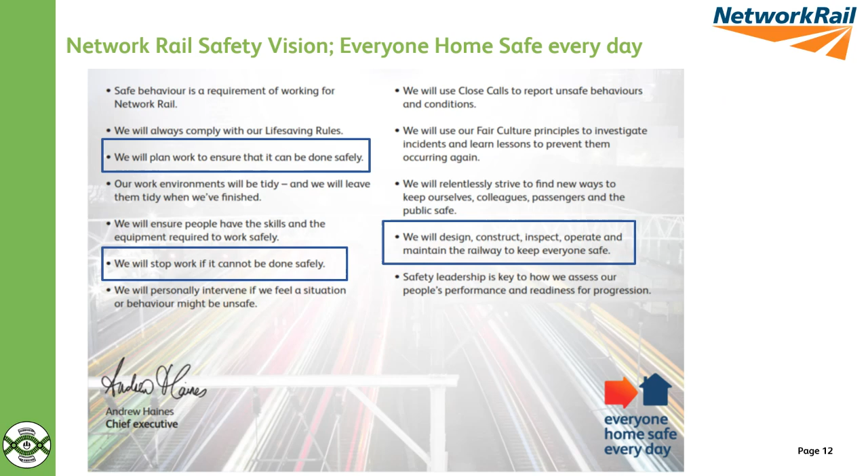With that in mind, and you've already seen a couple of examples of where temporary works is vital to us providing efficient solutions, we want to provide those efficient solutions safely.

So let's talk about what are temporary works. Spend a few minutes on this one. The HSE have said temporary works are the parts of the construction project that are needed to enable the permanent works to be built. You can probably read this faster than I can say it, but I'll say it anyway.

Usually the temporary works are removed after use, e.g. access scaffolds, props, shoring, excavation support, falsework and formwork, etc. Sometimes the temporary works is incorporated into the permanent works, e.g. haul road foundations and crane or piling platforms may be used for hard standing or foundations.

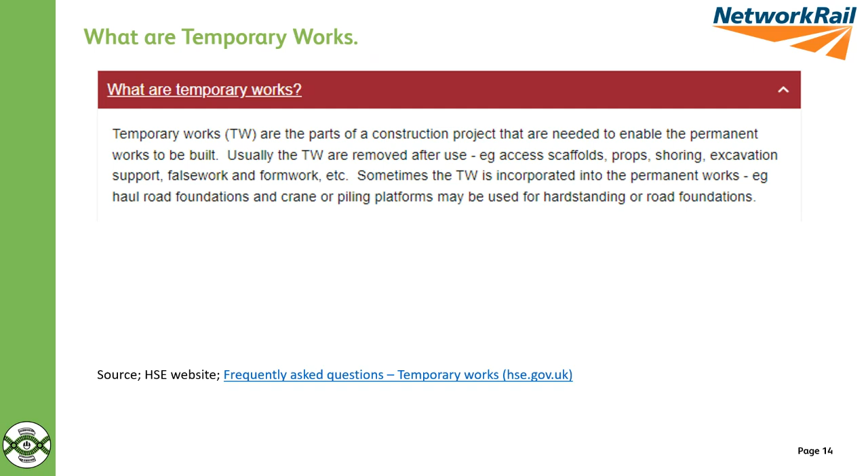The reason why I've got this on the screen is actually what it says next. It's very important that the same degree of care and attention is given to the design and construction of temporary works as to the design and construction of the permanent works. As temporary works may be in place for only a short while, there is a tendency to assume they are less important. This is incorrect.

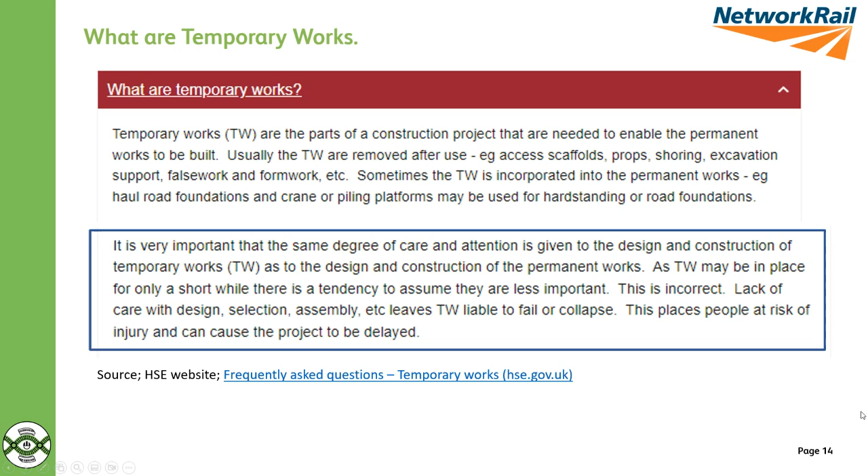Lack of care with design, selection, assembly, etc. leaves temporary works liable to fail or collapse, while in fact it also leads permanent works to fail or collapse. And this places people at risk of injury and can cause the project to be delayed, reputational damage, you name it. I thought that was interesting because we're already aligned with the HSE.

This is from BS 5975. This is one of the first of many slides with lots of words on it, but I'm just concentrating on the boxed part of this standard at the moment. It can be described as providing an engineered solution, etc. That's broad, and then it lists the description of temporary works includes but not limited to all the things that you see listed. I'm just going to highlight one of them.

The description of temporary works includes supporting or restraining plant materials or equipment, including stability of waterborne craft. So for instance, if we've got a bridge structure and we have got temporary plant on that structure, is the bridge temporary works? I'll let you work that out for a minute.

Then it goes on, and so much I could talk about for hours and hours on 5975, but I haven't got the time. So I'll talk about this particular one. Permanent works designers should address the buildability of the permanent works and identify and make provisions for any temporary works and temporary conditions required by their design and their assumed method of construction. This should include, and you can see a load of things listed.

I'll just concentrate for a second on that. Temporary works and temporary conditions. So let's scratch our heads over that one for a minute. I'll also bring CDM into the fold. The designer should liaise with the PD to provide all necessary information to any temporary works or temporary conditions to the PC through the PD.

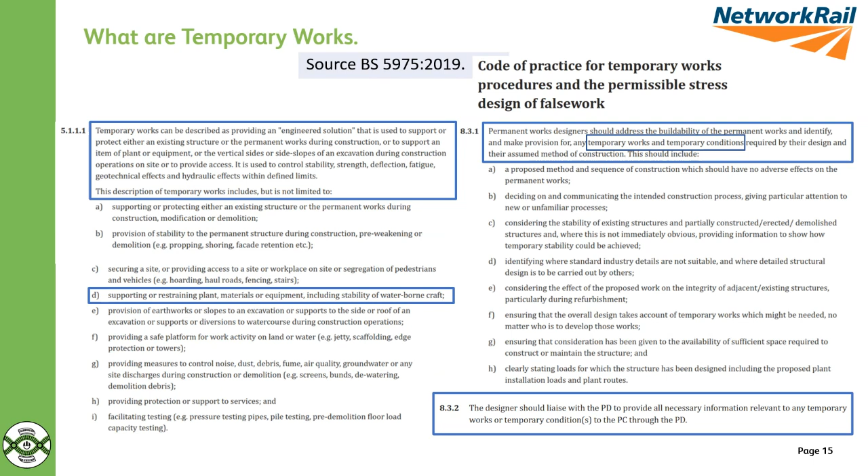When my bosses told me that I couldn't release anything from the consultancy that I was working for without a sequence of construction on it, that was for the good reasons that are now embodied into CDM and L153 by way of example.

So we now move to an excellent book, thoroughly recommend it, Temporary Works Principles of Design and Construction. I'm sure you've all read it. Please note that there is a 3rd edition coming out this year. Hopefully that will be coming out fairly soon this year, and there is a dedicated chapter on railway produced by various members of the supply chain with a bit of help myself.

And I will take this opportunity to give my personal great respect for the late great Peter Pallett, who passed away only a few weeks back and will be missed by everybody in the industry, whether it's permanent works or temporary works. Everybody owes Peter Pallett and his wisdom. We owe him for what we've learned, and hopefully I'll be passing a little bit of that learning on to you today.

So examples of temporary works include trenches and excavations. So some people think that we've got an excavation there. There isn't any temporary works there because we haven't put all the sheeting on the sides of it. No, it's just an open. Well, actually, according to this, temporary works includes excavations. I'll let you dwell on that one.

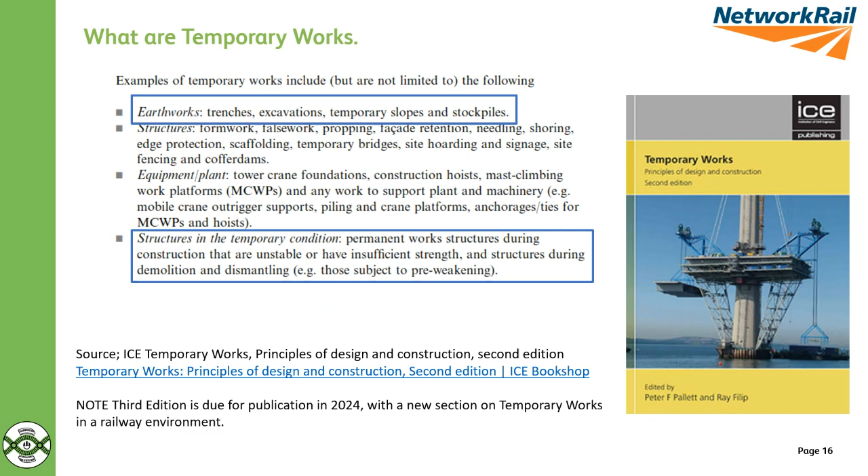What about this? Structures in the temporary condition. Permanent works structures during construction that are unstable or having insufficient strength, and structures during demolition and dismantling. So there's another take on things, and it continues.

Okay, Client's Guide to Temporary Works from the Temporary Works Forum. Now this was produced before the latest version of the CDM regulations, but nevertheless is a jolly good read, and I fully recommend it to everybody on this call. This guide asks readers to consider the following also: states of the permanent works which are temporary, loading conditions of the permanent works during construction or project execution which is not envisaged in the permanent condition.

Structures in states of modification or demolition. You're getting the gist now. And also some really important points here. In seeking to ensure that clients' interests are served with regard to temporary works, and by the way, I think that includes consultants and contractors' best interests, their reps could usefully challenge themselves with the following questions.

In what way can I be assured that the permanent works design solution is developed to minimise risk from temporary conditions? We should all be asking that question. And also, in what way can I be assured that those temporary conditions of the permanent works that need temporary works to control them minimise the extent and complexity of the temporary works, eliminating, substituting and reducing them so far as is reasonably practical to minimise the risk overall? And I'll be dwelling on that in a little bit.

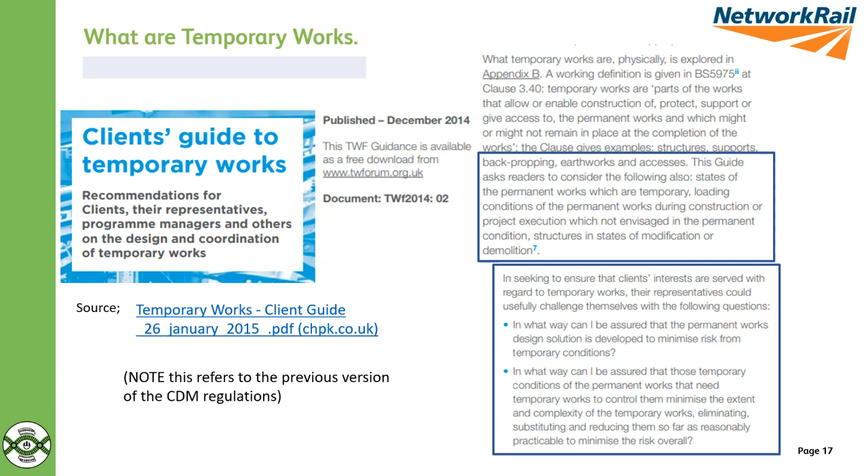Next page is Appendix B, where there's a whole page of narrative which you clearly can't read on that paper, but I'm just signposting it to you. That's a great read to talk about the wide scope that is temporary works and temporary conditions. They conclude that section by saying the safe position is to consider that every condition on site is temporary works until proven otherwise, and it gives two main exceptions, as you can see there. And then it also says, and sorry for me taking so much time just defining what temporary works is, but I think it's really important that we get the full scope.

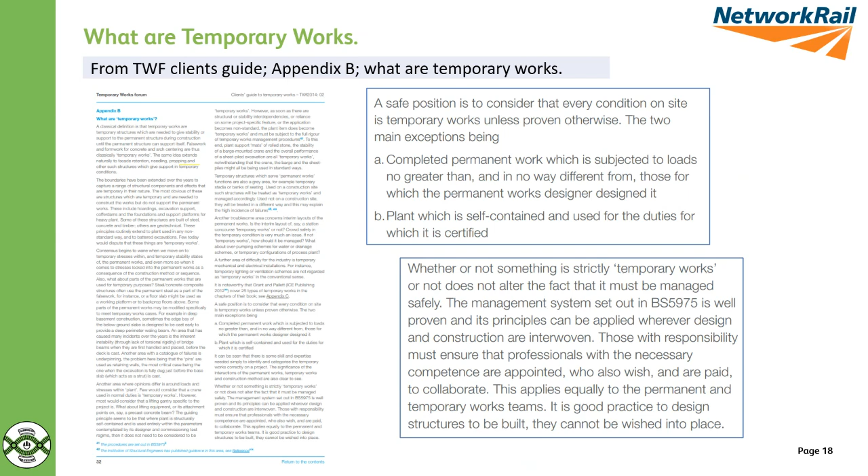Whether or not something is strictly temporary works or not doesn't alter the fact that it must be managed safely. We can all agree with that. The management system set out in 5975 is well proven, and its principles can be applied wherever design and construction are interwoven, as they often are. Those with responsibility must ensure that professionals with the necessary competence are appointed, and also wish and are paid to collaborate. More of that in a bit. This applies equally to the permanent and temporary works teams, both. And I love this little sentence. It is good practice to design structures to be built. They can't be wished into place.

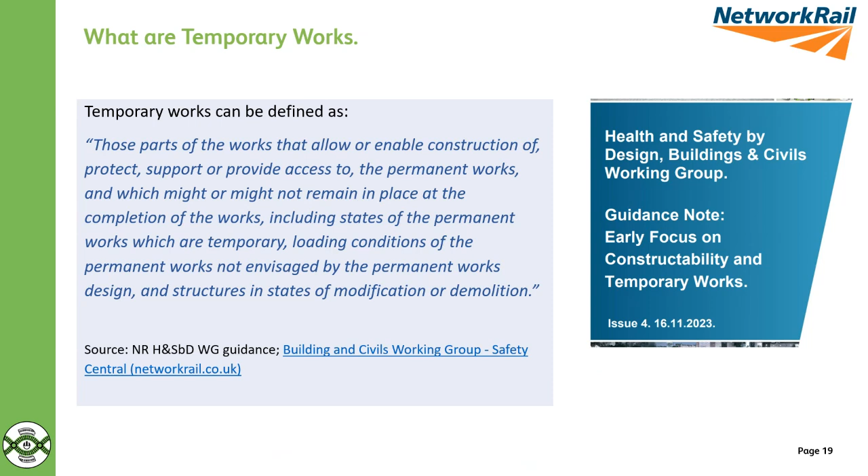So, to conclude this bit, from our health and safety by design guidance note on early focus on constructability and temporary works, we've defined, and this is a collaborative effort between the supply chain and ourselves, temporary works can be defined as those parts of the works that allow or enable construction of, protect or support or provide access to the permanent works, and which might or might not remain in place at the completion of the works, including states of the permanent works which are temporary, loading conditions of the permanent works not envisaged by the permanent works design, and structures in states of modification or demolition. So it's a coverall. And on the basis of that definition, and we can argue greatly as to whether or not it could be different, on the basis of this, I'll be continuing for the rest of this presentation.

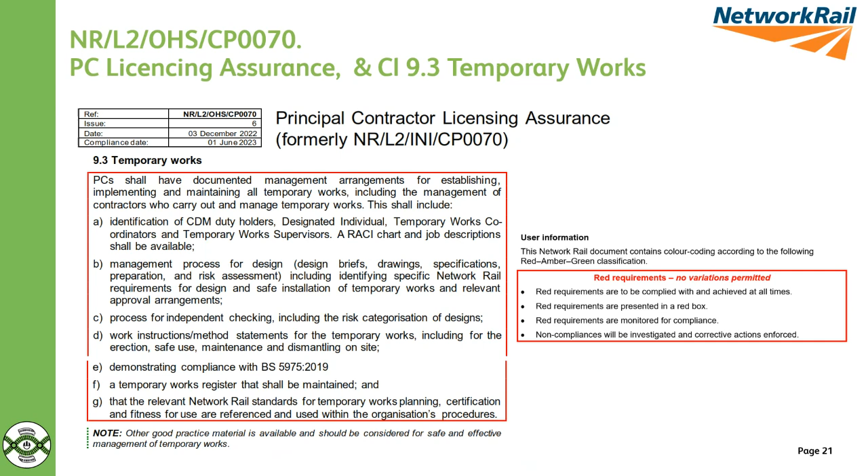Some relevant standards. I am going to go very quickly through these. One of the standards is that we require our PCs to have a PC license, and there is an assurance standard for that. In that standard, there are requirements that are red ragged, which means we can't vary against them. And 9.3 is for temporary works, and it's shown on this screen. I will dwell on it only for a moment. This gives a whole list of things that we expect our PCs to do, and they do. So that is great. But this is an expectation for the business that they do all the things in there. And I'd ask you to please, if you're only halfway through reading that, please pause and think about it and see that your operation is doing what we're asking of it if it's working on the railway.

Then we've got a standard, and this is one of many similar standards for different disciplines: engineering and architectural assurance of buildings and civil engineering works. So we've got a standard in place, and those of you who work on the railway will hopefully be very familiar with this standard. This requires various things, and I'll just highlight these two.

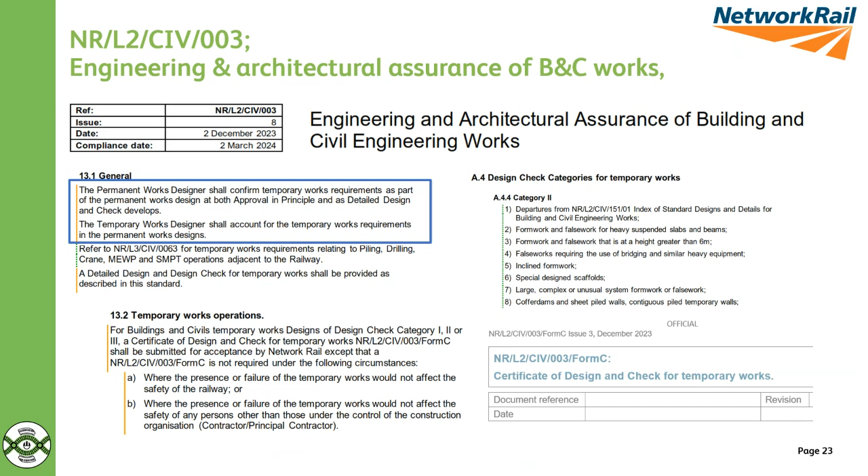The permanent works designer shall confirm the temporary works requirements as part of the permanent works design at both AIP and detailed design and check. And the temporary works designer shall account for the temporary works requirements in the permanent works designs. This is an expectation that our permanent works designers will be thinking about temporary works, and that our temporary works designers will be thinking about the permanent works, and hopefully integrating the two.

As part of some recently updated guidance to Civ 003, we've got a set which is GN Civ 003. We have got a section on temporary works, and this is 2 pages of really good points that have been produced over a period of about 20 years that are good things to do for business. So if you follow these things, hopefully you de-risk projects. And I'll just draw your attention to a few of them.

The project team should undertake constructability reviews from early design stages to enable efficient coordination of temporary works and permanent works requirements. And I am going to read the note out. Early consideration of the provision of all necessary temporary works will enable constructability and maximise efficiency, allowing the team to develop temporary works designs which are fully risk assessed and fully integrated with the permanent works, and vice versa, in good time to allow safe, efficient design and execution. Now, what's not to like about that?

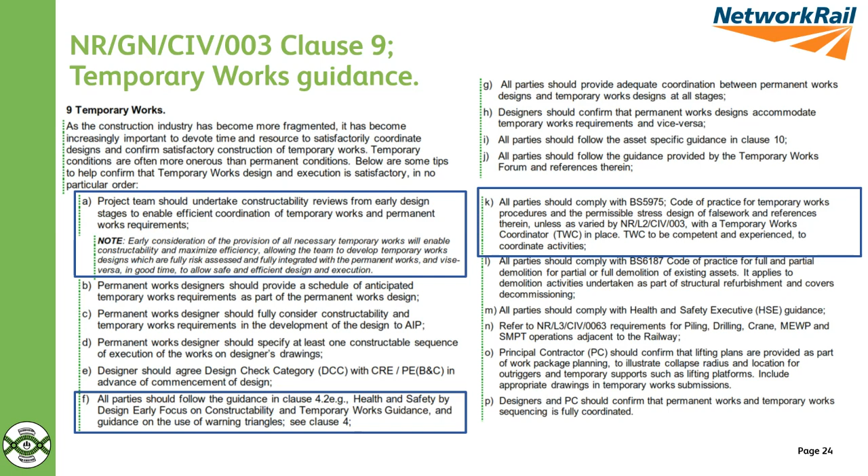Also, all parties should follow the health and safety by design guidance, which I'll come to shortly. And all parties should comply with 5975 unless varied by Civ 003. The TWC needs to be in place, and it needs to be competent and experienced. Couple more, there's another page full here. All activities should follow a clearly defined work package plan with defined sequence of working when critical to temporary stability. Any changes to the work package plan or sequence should be referred to the designer prior to any variation. Some examples coming up of where that hasn't quite gone to plan.

And also any significant site changes to temporary works which might affect Network Rail managed infrastructure are to be agreed with the designer prior to execution, with redesign and assurance as appropriate, as required by 003. And finally, provide and enable sufficient time to do all necessary planning and design to enable safe and efficient construction without importing risk.

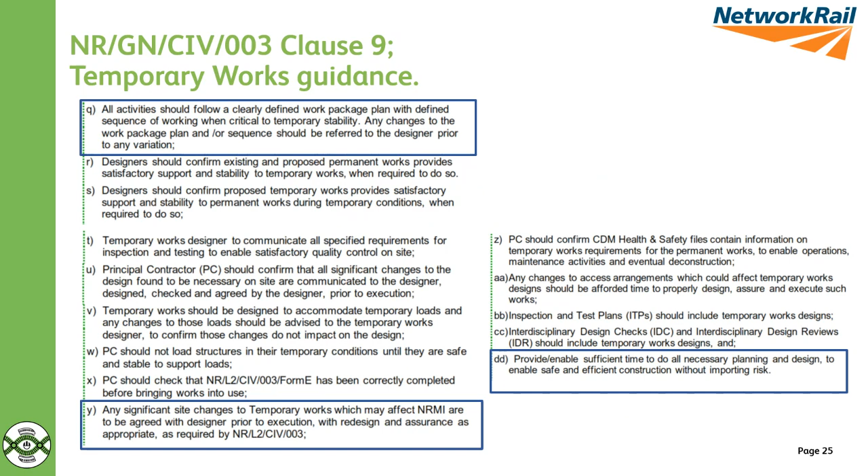Here is a page devoted to the health and safety by design activities and the guidance that has been produced. And this group is a supply chain and Network Rail working together to think about health and safety by design. And over the years, we've developed some really useful guidance. I haven't got time to go through this in much detail now, but I've pointed you in the right direction. There's a link at the bottom, and you'll get these links at the end. And that link is to this freely available information.

And if there's nothing else that you do as a consequence of what you've heard today, please look at the guidance note, early focus on constructability and temporary works. That's been produced over the past 15 years. It's on its 4th iteration and is well worth a read, whether or not you're in railway.

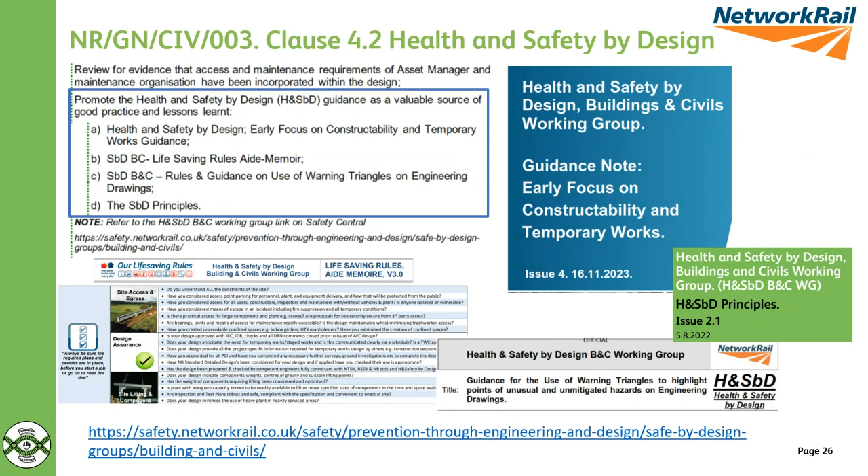There's also another standard, Civ 0063. This is for all the things that you see at the top for similar plant operations on or adjacent to the railway. Now, we have got a vested interest in ensuring that things that might affect the railway don't affect the railway adversely, and so the people who work within influencing distance of the railway. So there are various requirements that ASPRO will deal with when you're working on such projects, and we need to prevent things happening like the things that you see in this slide.

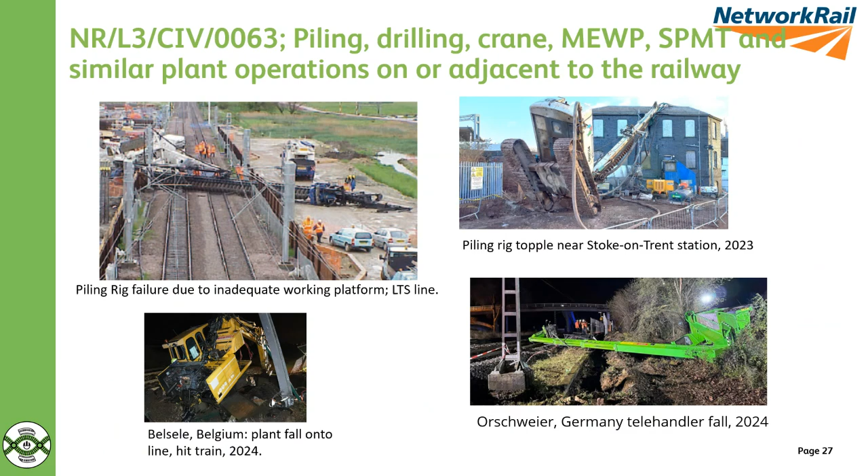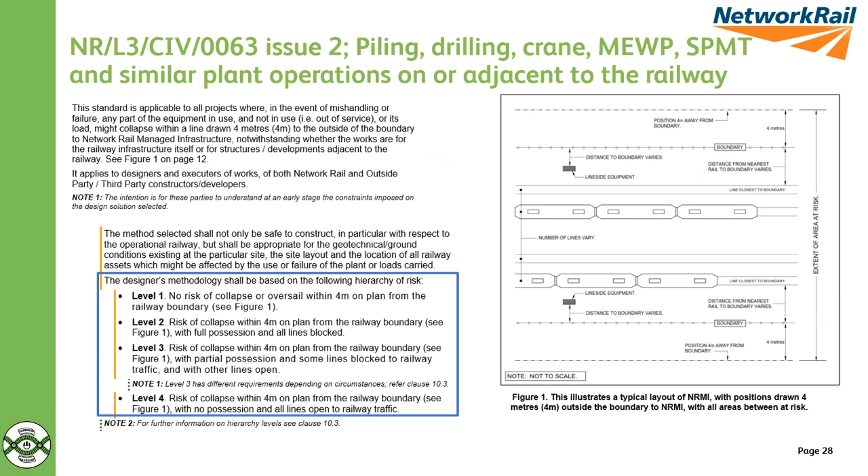Now on to the early focus on constructability and temporary works. It's 80 odd pages long. I'm only going to give you a few of them, and I'm going to go quickly through them as well.

One of them is this: many of the problems caused by a lack of constructability or inadequate consideration of temporary works are due to a lack of focus and planning at an early enough stage in the project. This is where I'm really trying to push people to think about temporary works and permanent works early on. A lack of focus and planning at an early enough stage leads to late procurement, late submissions, compressed review times, disruption to works, lack of appropriate risk assessment, lack of understanding, and mistakes.

It also leads to late change and poorly managed change, all importing risk. It's worth a moment to dwell on that when you get time to have a look at these slides afterwards.

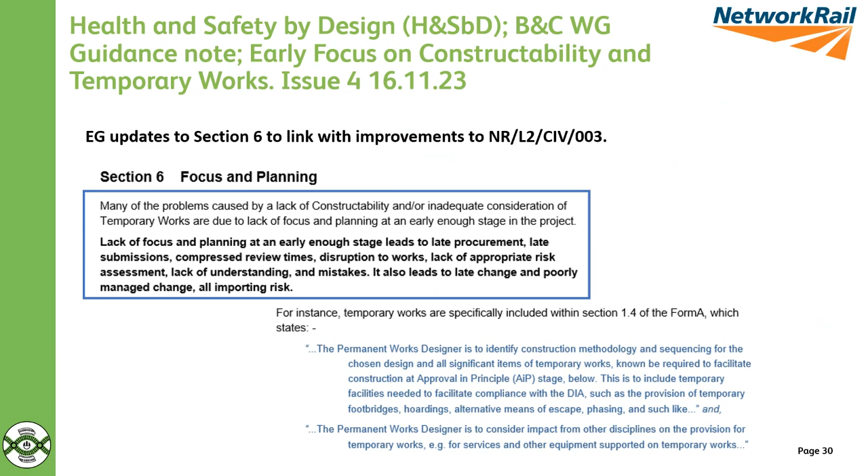Also in Appendix A, there's an example of a constructability review. You can do this in many ways, and this is just an example that the supply chain and ourselves have come up with, basically a list of questions to ask when you're looking at a constructability review to make sure all the ducks are in a row.

At the top it says, at AIP stage onwards, is the IDC and IDR complete, and do these consider both the permanent works and the temporary works design interfaces with each other and other asset groups? It's important that we do all of that early on, in my humble view, and the view of the supply chain. Now let's have a look at this particular one.

Have a clear understanding of these issues, particularly at the early stages of the project. It is vital to ensure there's a robust basis for selecting a single option, and that the selected option doesn't carry undue risk impacting safety, program, costs, rail network performance, or otherwise. We're expecting consideration of constructability at an early stage, well before we get to AIP.

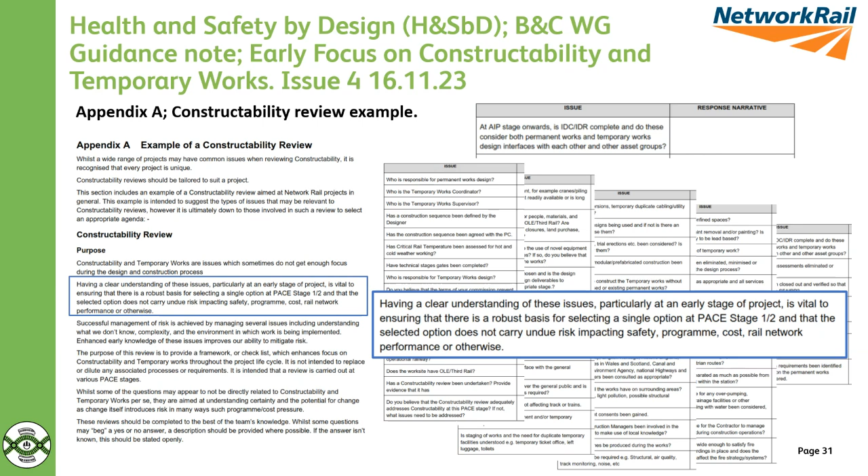So that we know we've got the ducks in a row and that we're heading in the right direction. It's really important we do that, otherwise things can go pear-shaped quite quickly.

Also, it is essential to appoint somebody to have these accountabilities and be the controlling mind. For instance, the TWC or the CEM supported by the CRE - these roles will help ensure all of this coordination is done, and I won't dwell any further on that.

This is an example of where things didn't quite go to plan. This is Gerrards Cross in 2005, and there are some links there to some really useful information that's been dug out of HSE by a member of the public, which gives you a full insight into what happened here.

In a nutshell, the tunnel collapsed because the crown was overloaded and there was insufficient backfill to the sides to maintain it. It induced excessive bending moments at the quarter points of the arch structure, leading to the formation of plastic hinges and subsequent collapse. Yeah, that's all very structural engineering, isn't it?

What actually happened was the sequencing that was agreed wasn't followed, and therefore the loads on the structure weren't as envisaged by the permanent works designer, and it collapsed.

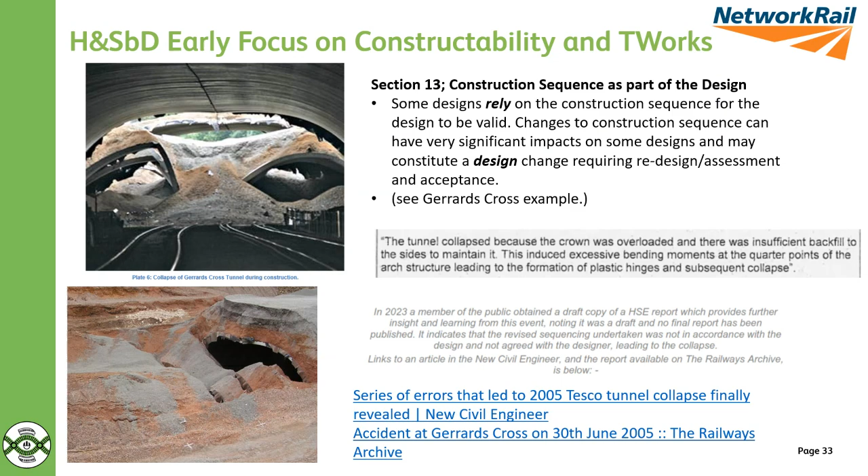There were signs that it was not behaving properly because the crown was much lower than it should have been, but nevertheless we were very, very lucky that a train exited that path soon before it collapsed, and we didn't have a disaster on our hands. Lots of lessons to be learned just from that one.

And then quickly, on the LTS line, imagine if that piling rig had fallen over as a train came into that path. Yes, we want to avoid that, folks. In the guidance, there are examples of where we need to do things better, but also really good examples of good practice as per the right-hand side. I won't dwell on that any further now.

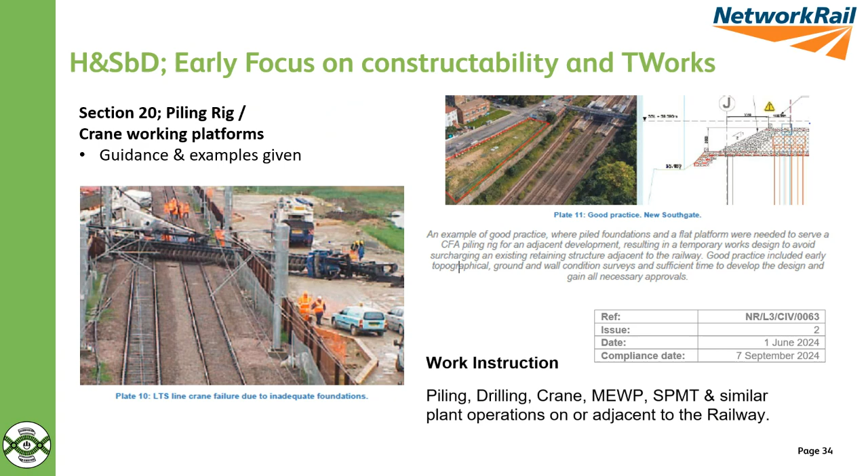So let's have a look at some lessons learned. I'm just conscious of time, so I will speed up slightly. A few years ago at Gypsy Patch Lane, we were trying to move a 5,000-ton bridge into place during a blockade using SPMTs.

On the right-hand side, you can see a trial run. They didn't turn the wheels, but nevertheless the mat went down by about 8 inches or so. So is that a success or a failure? Well, you can guess what the criteria said and whether or not it was a success or a failure.

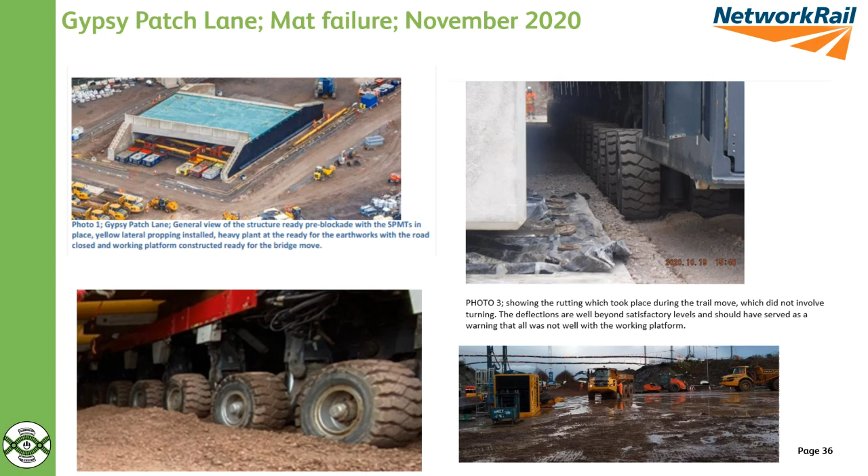But notwithstanding that, things proceeded. The place was a quagmire, as you can see on the bottom right, and the axles got stuck in the mat. There was a long overrun, and there was no one hurt, although there could have been. And there were a lot of things that went wrong on that job, which were entirely preventable.

That's wrong, folks. You need to, if you're going to change the design, you need to involve the designer. If you work together as a team, you'll have a solution that's safe. If you don't, things might go wrong.

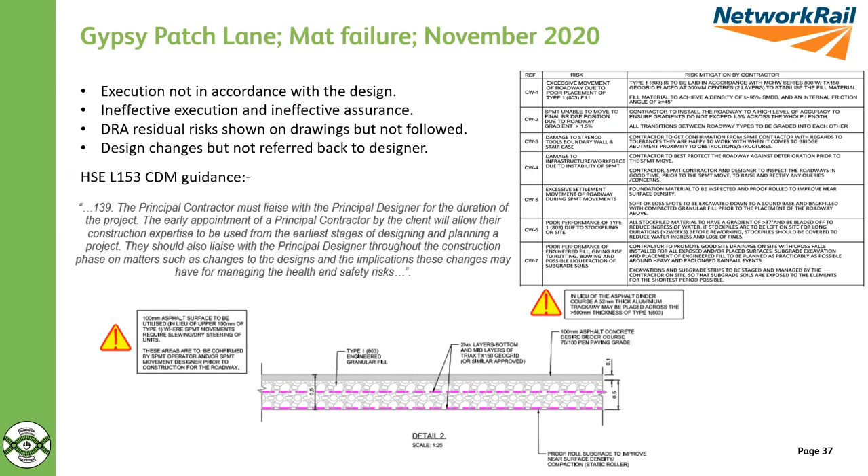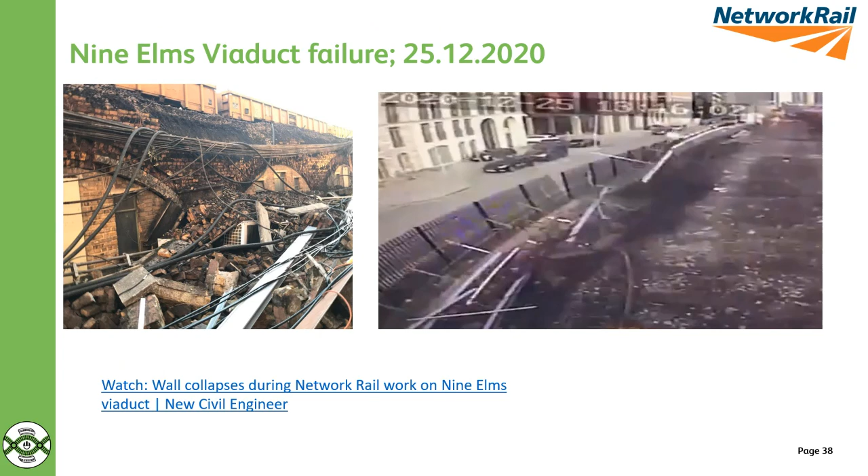Next one, we were very fortunate that this incident happened on Christmas Day in 2020, because you can probably imagine, looking at the left-hand picture, the state of play had people been going about their normal activities in the units underneath these arches. Nobody was hurt, thank goodness, but about 80 meters of the spandrel and the parapet to this viaduct went over, and there is a link to some videos showing it actually happened from the cam on the plant that was sitting on this viaduct.

So what went wrong here? There's insufficient consideration of the effects of heavy plant loads on the existing structure. So was the temporary works there? Go back to what I was talking about earlier. Insufficient understanding of the condition of the existing structures, insufficient coordination between disciplines, and insufficient learning from previous similar occurrences.

So we've had this occur before, but we didn't learn from it, and we've done a lot of learning since on this particular example. You can see the state of the brickwork with bits of chopped down buddleia. Well, you know what happens with masonry when it loses its bond, and when you don't work out the forces from the plant on the structure that you're changing the track on, then you might be importing risk. You certainly will be if it's not capable of supporting those loads, as was the case here.

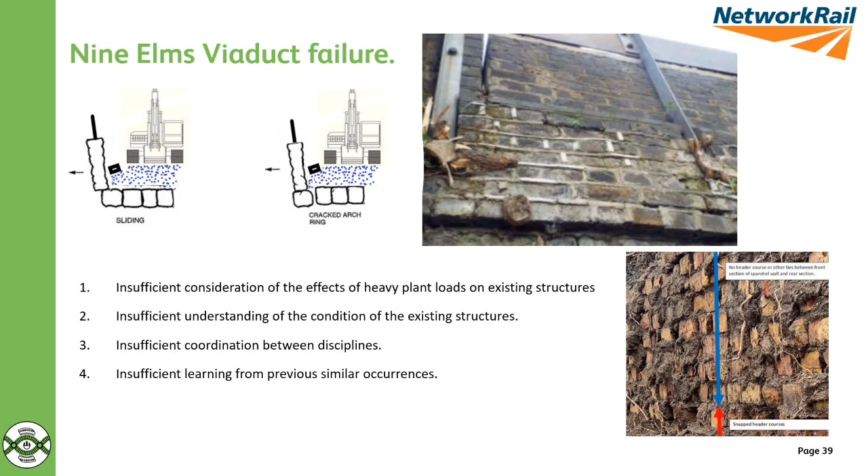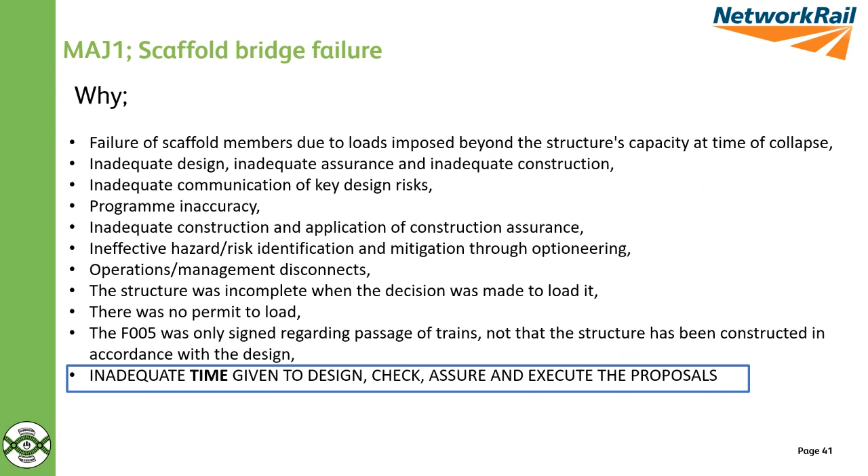And I find that deeply unsatisfying. Lessons have been learned from this particular incident, and those lessons are actually incorporated into updates to the standards that I mentioned earlier. So hopefully, if you follow the tips I've been through previously, we'll never be in a situation again where that sort of thing might happen. Not fingers crossed, really - if you follow the rules, the guidance, the standards, the chances of de-risking this sort of event from happening are vastly improved.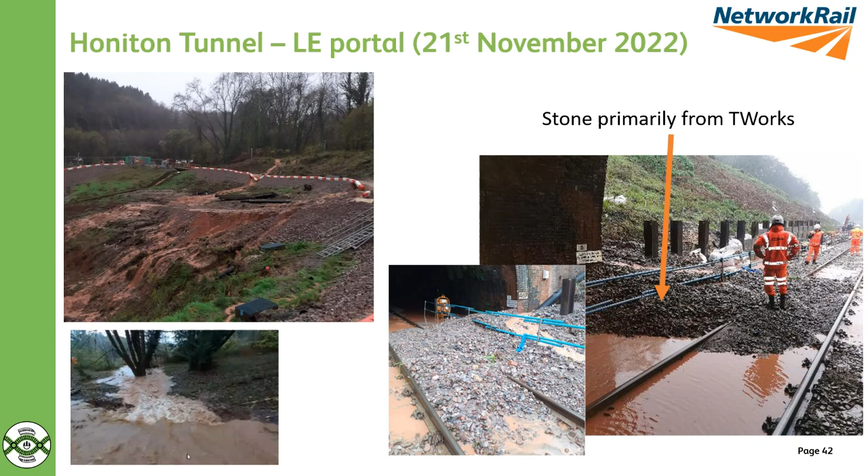We need to give people the time to do their job properly, and they need to do the job properly.

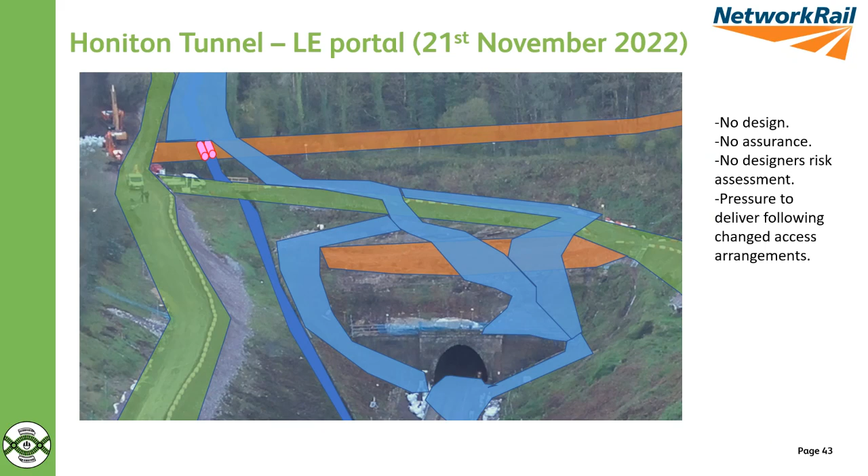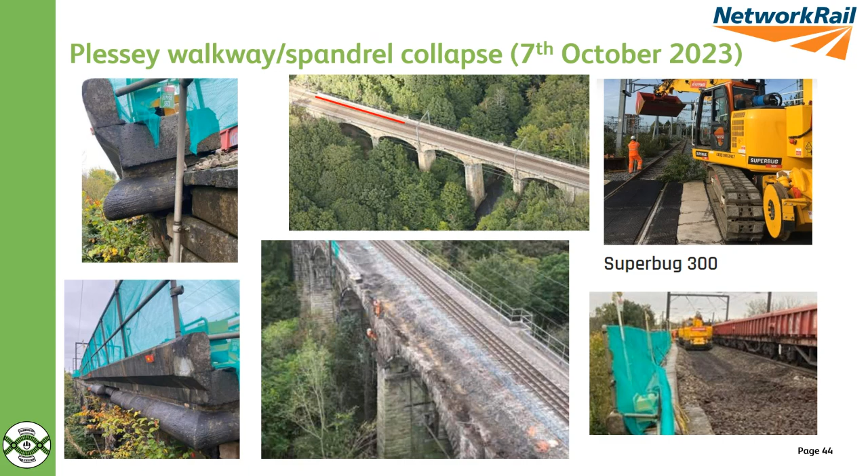More recently, this is October 2023. This is under investigation at the moment as part of a class investigation, looking at the bigger picture. Again, we've got a huge piece of plant - I think it's 36 tons - called a superbug, that was used for a track renewal. It is suspected there was contact between that plant and the structure, and the structure leant over and could have fallen over. It had to be demolished, and you can see from the photographs it looks like it's in quite a precarious state. It's actually rods in the permanent works that are stopping this from peeling over. That could have been a really big problem. Fortunately, nobody was hurt.

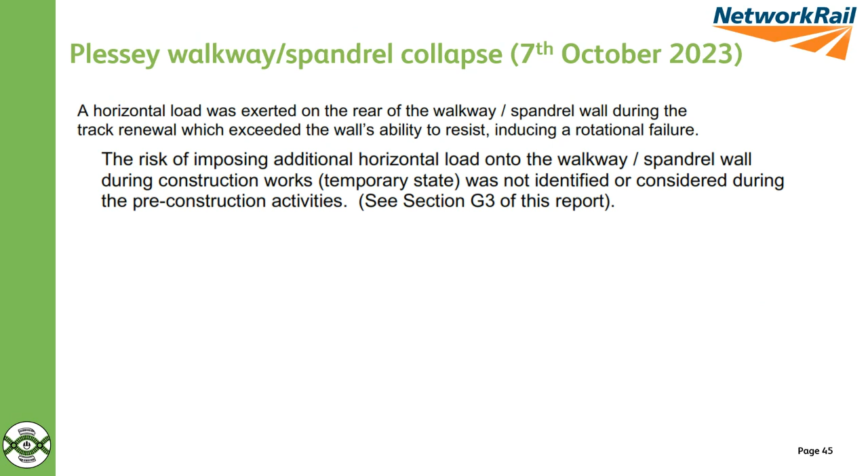Why did it happen? The risk of imposing additional horizontal loads onto walkways and spandrel walls during construction works - the temporary condition - was not identified or considered during the pre-construction activities, contrary to everything I've said in the past half an hour or so.

And these are the key points: the processes designed to prevent these things from happening weren't followed. There wasn't a B&C project engineer in place. The DPE was not experienced in buildings and civil structures or temporary conditions. There was no temporary works design assurance in place. There was insufficient consideration of the effects of the plant on the existing structure, and the forces imposed by the heavy plant were twice the resistance of the structure.

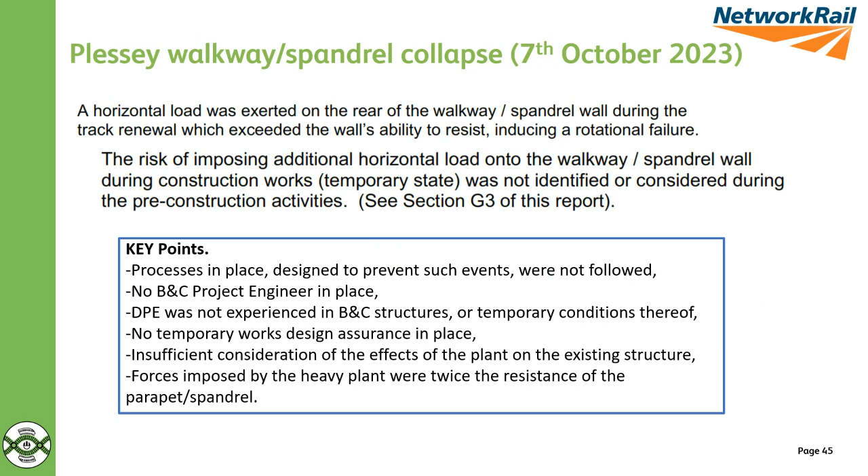So, lessons learnt, folks. I've given you two examples where we haven't necessarily learnt lessons, but hopefully moving forwards we'll be learning lessons from these events so we build them into what goes forward in future. I'll come on to that in a second. That's enough about things that have gone wrong and reasons why temporary works is very important. But this is also about why they're important - showcases for temporary works engineering.

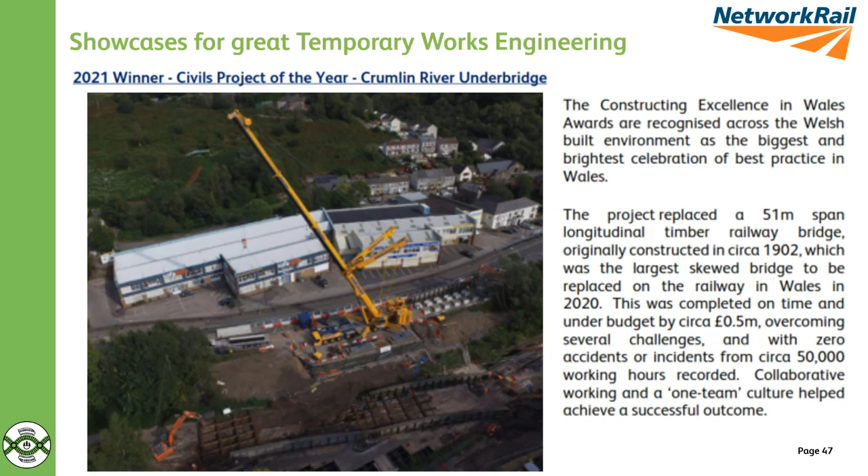This is a good one - a local award winner, and this is a project where the permanent works designers, the temporary works designers, the PC, the sponsor, and the entire team worked together to enable us not to close the road, which would have meant a 40-odd mile diversion. The permanent works designer changed the permanent works design in conjunction with the temporary works designer, who was changing their temporary works design, so that they could integrate permanent works and temporary works and get a really successful project delivered. Hats off to the team for doing what they did there.

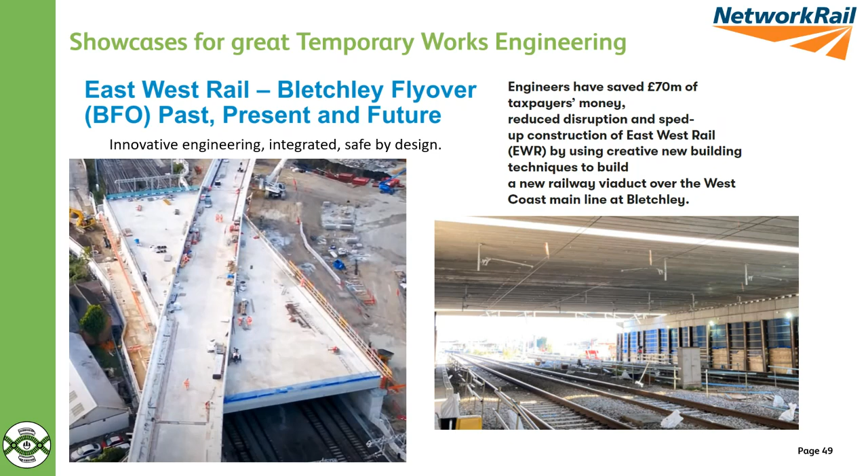They used modern methods of construction, and some people in the business will argue MMC has been around for decades, just rebranded, but nevertheless they used it to affect efficiencies, and we should be doing more of that. For instance, we didn't need lots of expensive formwork because we used precast concrete panels to effectively be the formwork for the abutments.

And of course that means more craneage, so there's balances to be had. The team worked together to integrate things like having castings within the concrete so that they could fix scaffolding for access purposes to it. This is proper integration of permanent works and temporary works.

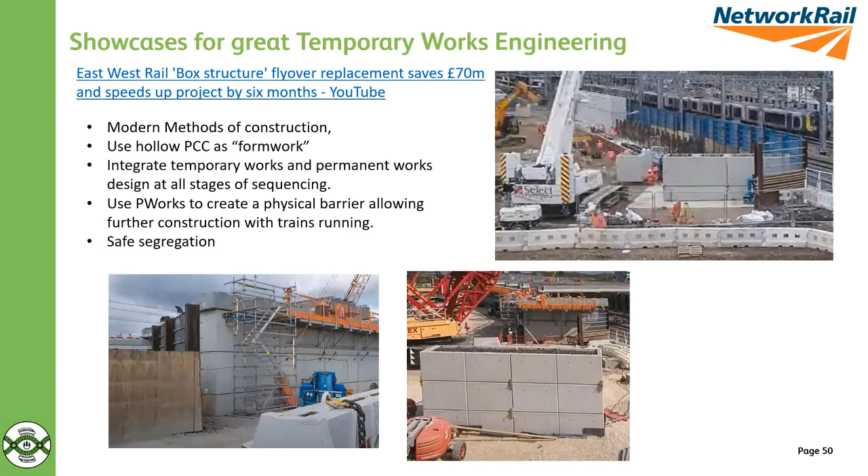Last one before I finish, and I know I've got a few minutes: Ravenscraig. We took the lessons learned from Gypsy Patch Lane. In fact, we produced an EAN, an engineering advice note, then helped the TWF develop industry-wide excellent guidance on SPMTs, and the team at Ravenscraig used that guidance to help deliver a fully integrated permanent works and temporary works solution, which resulted in a very successful project. Hats off to that team for bringing together the thinking that way to deliver in the way they did.

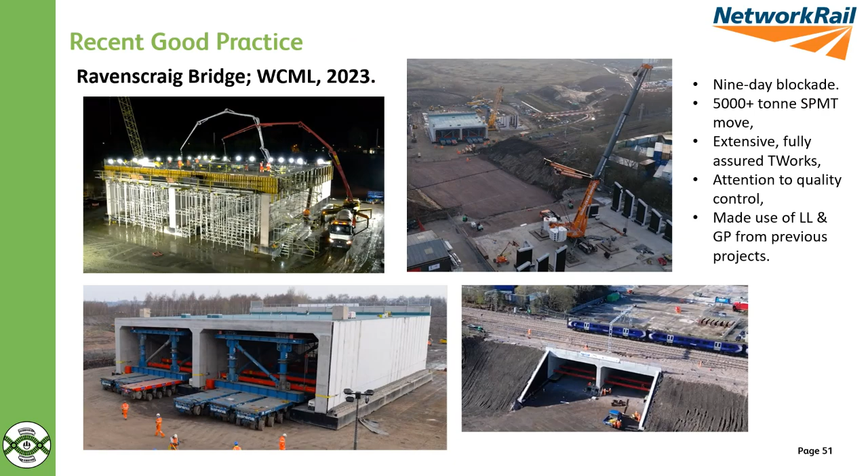So on to some conclusions, leaving a few minutes for questions. Do you agree that adequate consideration of temporary works, including temporary conditions, is key to business efficiency and safety? Do you agree that such consideration will prevent collapse, prevent ingress or egress of materials, de-risk injuries or fatalities, de-risk delays, reduce financial, contractual and reputational risks, reduce project costs and improve the carbon footprint of projects?

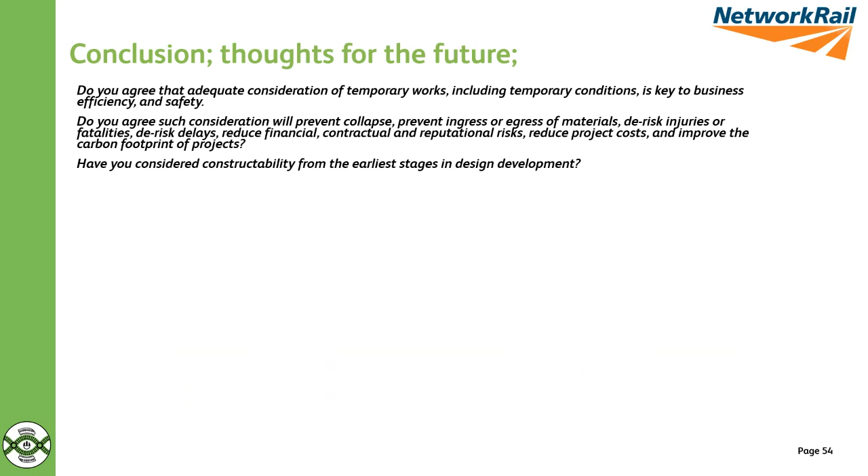Well, I do. Have you considered constructability from the earliest stages in design development? Get the contractors and the engineers in the same place to work on the best solution early doors. How are your projects ensuring that temporary works are developed to AFC?

Has permanent works and temporary works sequencing been fully considered, including consideration of all the temporary conditions of the permanent works? Has all the sequencing been integrated between the P works and T works, appropriately agreed and checked? And is there a controlling mind?

And more: has contingency planning taken place in case things don't go to plan? Is there appropriate supervision by appropriately experienced persons on your project, including engineering supervision where appropriate? And if things aren't right, are the right people looking at them?

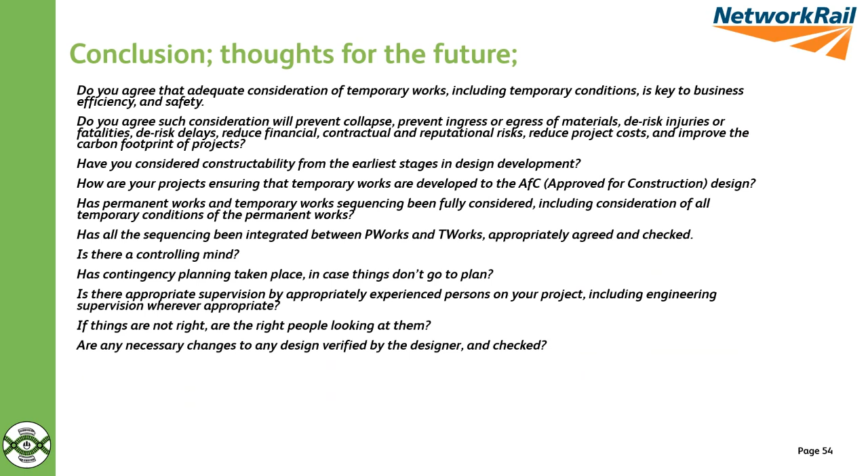Are any necessary changes to any design verified by the designer and checked? And are all the risks being properly assessed and eliminated, mitigated and controlled so far as is reasonably practicable at all times? And nearly finally, how do you disseminate lessons learned and good practice, both internally and externally, for wider industry benefit? And that's the reason why I'm here today, folks.

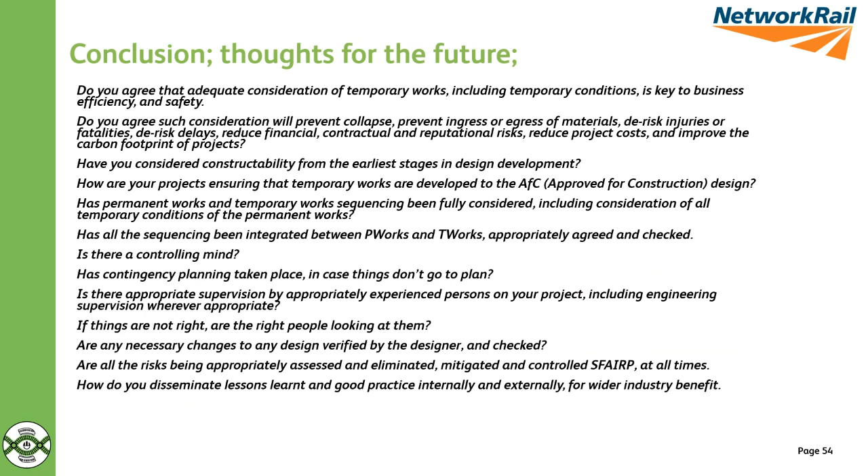So in conclusion, what will you do differently moving forward to get everybody home safe every day? Any questions can be directed to me at the email shown in my final slide.

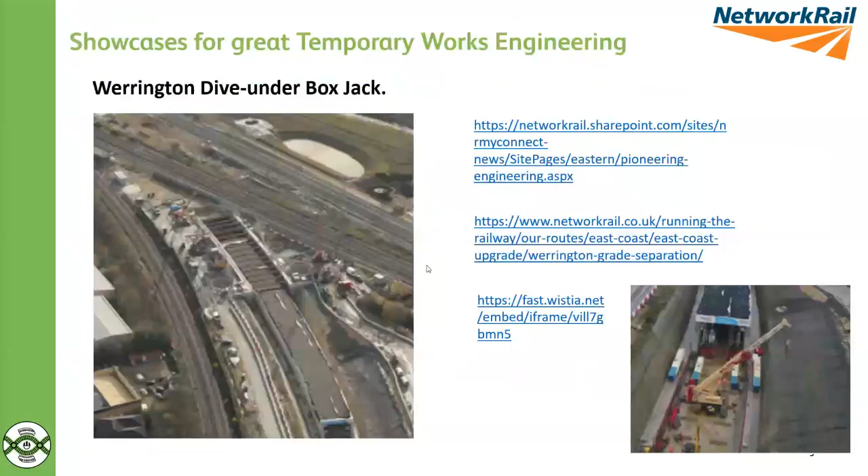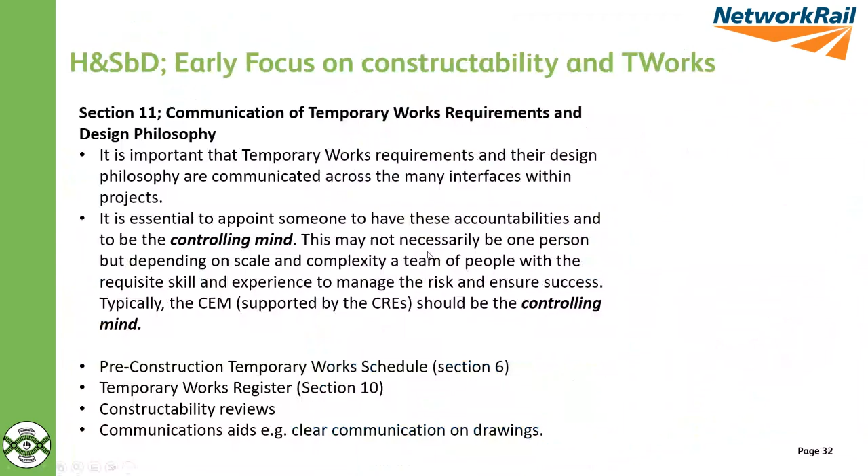I believe that our permanent works designers, when they consider constructability, come up with some utterly fantastic solutions. I'm going to go back right to the start of this, if this is still being shared. Yes, it is. I'm going to go right back, keep going, getting finger eight now, right back to the two slides I showed right at the beginning. Keep going, Steve. Crikey, I've got through a lot of slides very quickly, haven't I? Apologies for that, guys, but you can read them at your leisure.

Thank you. Next question from B. Bailey, which goes: really pleased to hear that temporary conditions need to be discussed in the same light as any resulting temporary works. This should be recorded in the temporary works register as well, given the outcome impacts how the risk should be managed. Good practice for temporary works coordinators?

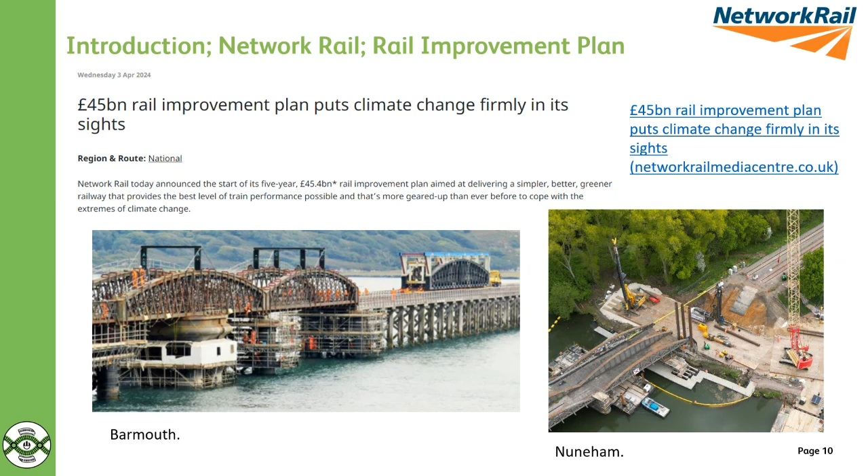So we've had quite a lot of questions come through on the chat, but let me see. I'll take one that's already been published. So a question which says, I note that you don't refer to or differentiate the PC TWC from a TWC as required in BS 5975. Is there a reason for this in the NR world?

There's no reason for this in the NR world, because we actually say in our standards that we need to be following 5975. You'll know in the latest version of 5975, and by the way, I think that is being updated fairly soon, due for publication this year, the 2024 version, that there is the need for a PC TWC, but there's also the TWCs from the other contractors. I haven't got time to go through the requirements in 5975, but the TWC from the PC and the TWC from the supply chain all need to work together.

Yeah, I haven't differentiated them in this particular three quarters of an hour because I think I've rammed in too much already. But look at 5975 and our standards: we require our PCs to have a TWC, but there will be coordination down the line, especially for very complicated projects.